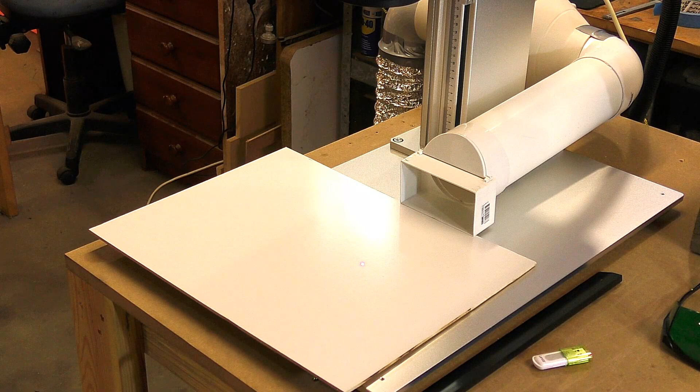Okay, you can see the smoke rising a bit there, I think. So I've got a mark there now. Hopefully you're picking that up. So now we can accurately measure that, if I can. So we have 237 and 256. I'm going to show you what to do about that.

So we come down, tick continuous off, open this dialog box up again. So scale. We'll do Galvo 1 first. Now I think this is X. Galvo 2, sorry, is X. So you go in here, it's very similar to Mach3, and you say, okay, we wanted it to do 200 millimeters. Alright, 200, and the actual measurement,

237. So we go in here and say 237, press OK, and it will alter the setting. Okay, think of this as the steps per mm in Mach3. So that's what it has determined it should be.

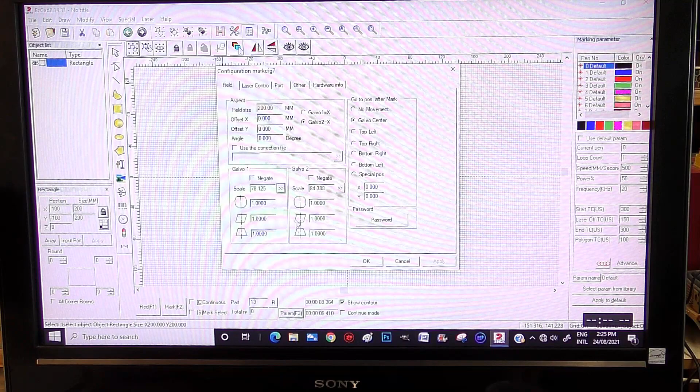So we go here, 200, so it's 256, and it has altered it to that number. So we're not going to worry about the bowing and out of square yet. Okay, so we're going to say OK, and we're going to go back to a piece of material that we're marking, and see what difference that's made.

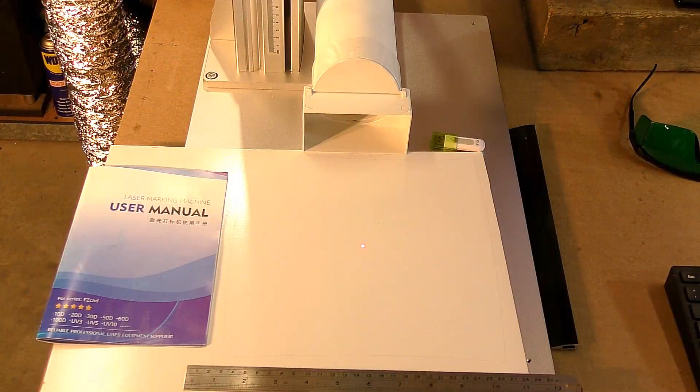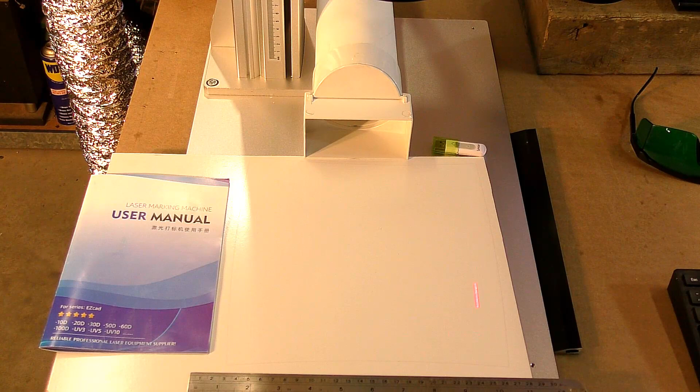Okay, I've put a couple of things on the table here just to see if I can keep the camera focused. Alright, I'm going to run the red dot again. Oh, that's a lot smaller. And I'm going to stop that and I'm going to burn it on continuous. Here we go.

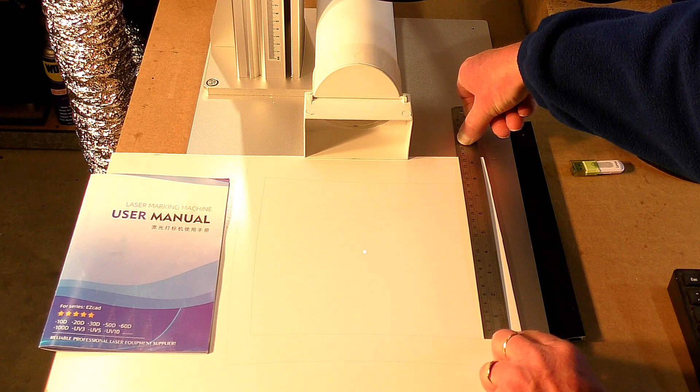Okay, that is now exactly 200 millimeters by 200 millimeters exactly, but we've still got the bowing here and in here, and I'm going to show you what to do about that.

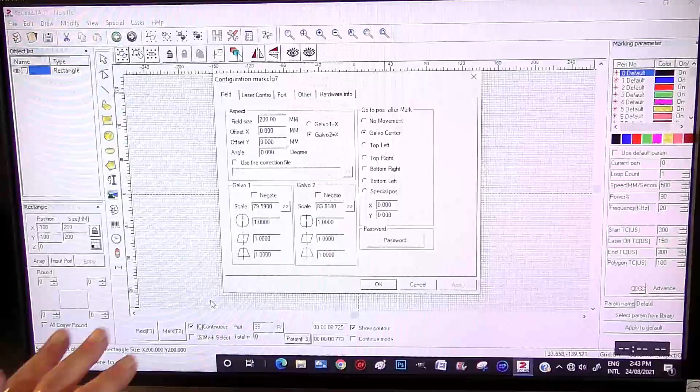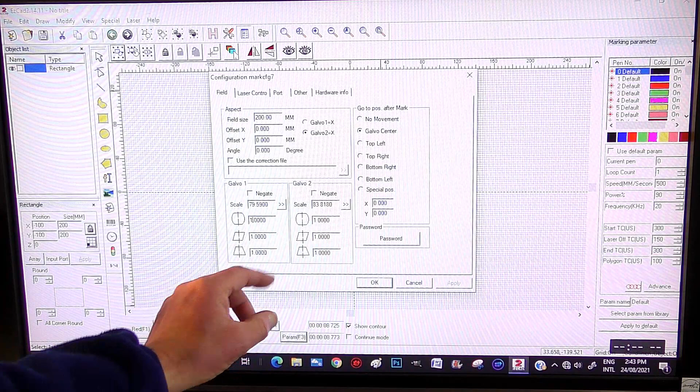Okay, so this is where it gets a little confusing, but the best way I can explain this: you see these are whole numbers, this 1, value 1. So what I can tell you is if you reduce this below 1, you're going to tend to squeeze the sides in. And if you increase this one above 1, it's going to take the top and bottom out.

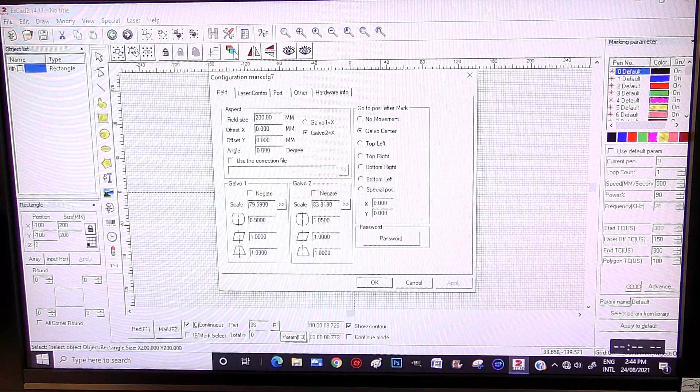So we're going to alter this now, and we're going to say 0.9. Just take it down a little bit. This one even less, I think. I'm going to put 1.05 here. And I'm going to OK that. And we'll see what difference that makes.

Okay, let's switch the red dot pointer on. A little bit of a shift there. Okay, let's turn that off. Let's mark it. Okay, stop.

Let's get my ruler. It's getting a little hard to see now. Oh, that's not far off. That's not far off at all. Actually, that's more luck than judgment. It might be very fractionally off there. You can see it's pretty straight, but it still has a very slight bow, so we're going to alter that one a little bit more. But I think we've gone over the top with this one. In other words, we've taken it the other direction. Alright, so I'm going to make a couple more alterations of figures here and see where we go.

Okay, so this should be the last mark, hopefully, because I've done this probably about 20 times. Okay, and mark. That's exactly right. And that's exactly right. And it's absolutely square. Absolutely square. Finally.

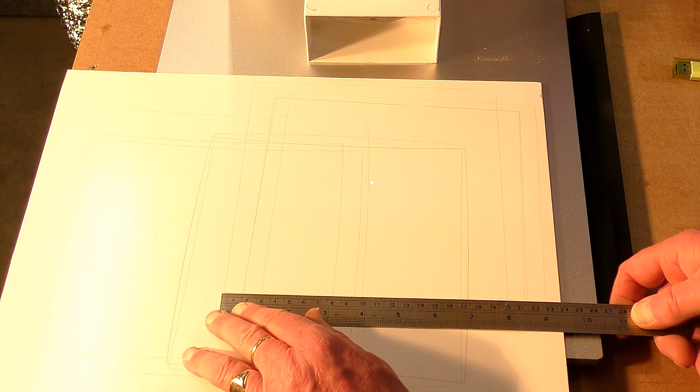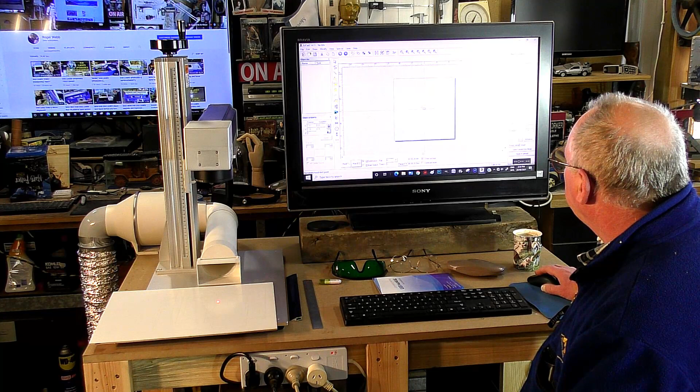Okay, so that is how to set the parameters up for a particular lens and a particular fibre laser in EzCad 2. There is, however, one more parameter to check and determine, and that is the focal distance now of this lens, which is a very easy process to do. So I'm going to delete this square, and I'm going to make another little square right in the middle here, right there like that.

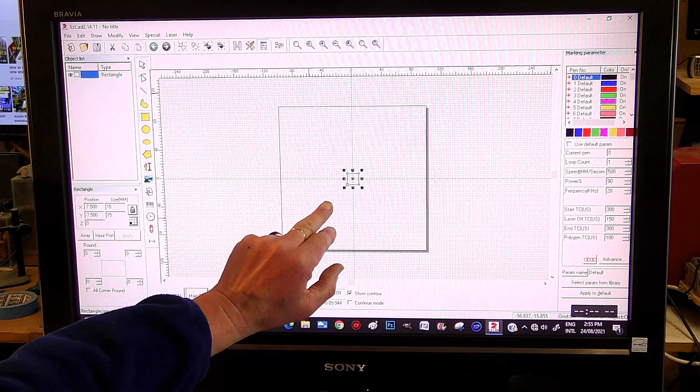Oh, look at that, 15mm. It's snapped to what I really want. And I'm going to do a process now called hatching. I'll get you in a little bit closer for this. Hatching is really filling that square in with lines that the fibre laser is going to follow—in other words, colouring this in using lines for the laser.

So you've got to go up to the H, and it will do several different types of hatching. It'll go from one side to the other, move across, and only fire in the blue—the red mark is moving from one position to another and not firing. Or if you press that, I think this is what they call bidirectional, so it'll fire in both directions. Or it'll do a swirly squarey thing.

Let me see, dotty—oh, we're back to that. So I think this bidirectional affair will... let me see, I like this one actually. I think it'll fire, not only keep on firing continuously, but go back and forth.

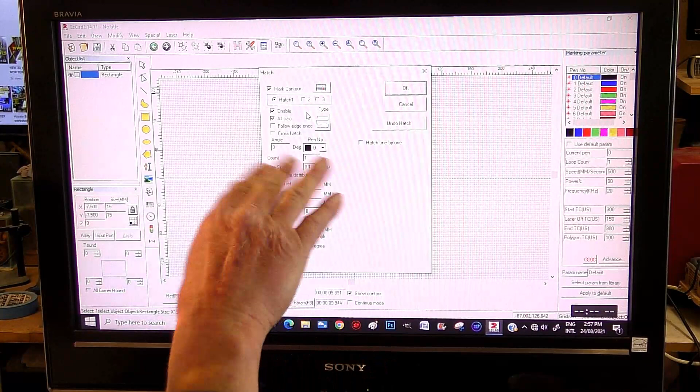Hatch 1, 2 or 3. So if you notice, hatch 1 is enabled—in other words, it's going to carry it out. Hatch 2 is not enabled, so it won't do 2 hatches. In actual fact, we only want 1, because this is just making the laser do a firing process on a piece of aluminium, just so we can raise the lens up and down and find the focus.

Or the focal point. Line spaces now, 0.1—yeah, that's fairly coarse. It's okay, we're only trying to find the focus.

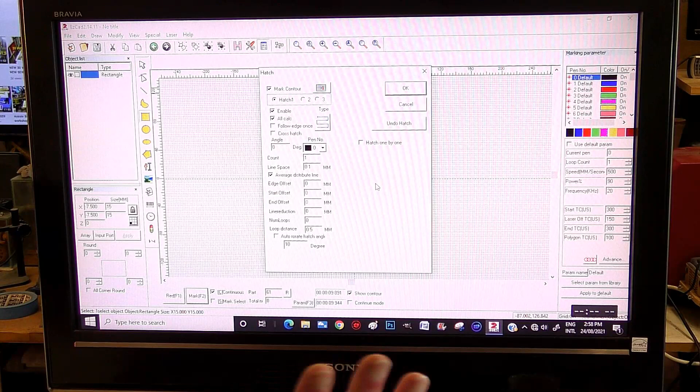We don't need to worry about any of this. We don't need to worry about a second path 45 degrees out. We don't have to worry about anything like that at all. We're just going to do a continuous. I'm going to hit continuous down here—it already is actually, but I'm going to hit continuous and it's going to keep on doing this all the time until I tell it to stop.

So we've set now a very simple hatch. We're going to say OK, and now it's coloured that in. Pen 0—this is the actual hatch we just did. That's it, so it's pen 0 when it's on, and it's highlighted blue.

Speed 500—yeah, that's okay. 90%. Yeah, okay, we're going to run with 90%. And frequency—now frequency, a very quick explanation on frequency.

All right, now frequency is actually graphically shown here as the beam hitting the material as a circle. It is a round beam. So at 20 kilohertz, you're going to have a bit of space in between—if you take the peak of this one to the peak of this one to the peak of this one, it's going to fire there and move, fire there and move, fire there.

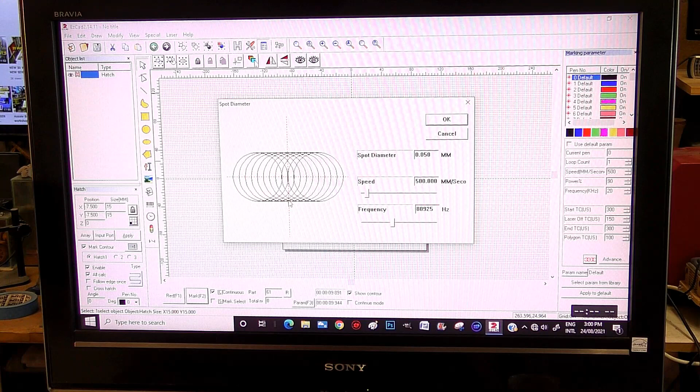So if you raise the frequency up like this, if I go up to 80—there we go, there's 80 thereabouts—you'll see that it fires very, very close together. Now you can imagine that, say, 90% energy is going to be dispersed over all these different firings, so it's going to be fairly weak. Okay, but it's going to happen really fast.

So if you bring it back down to 20, if I can make it 20—there you go, there's 20, just over 20. You can see that you're going to get full power for there, there, there. So you're going to be able to remove material. So the lower the frequency and the higher the power, the more material and the deeper you're going to go.

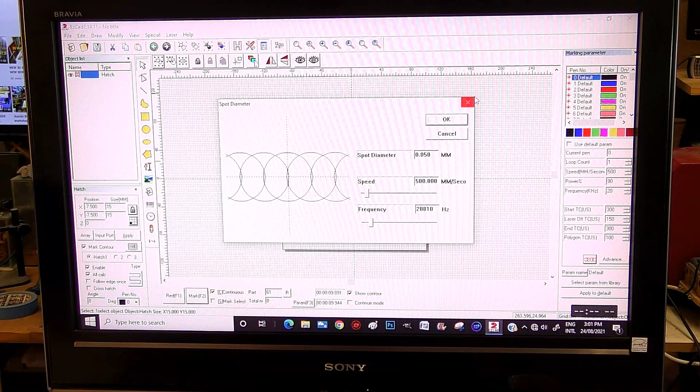You're going to remove more material because per firing, the energy of the laser is much, much greater. We'll go more into this as we progress with demonstrations and videos. So we'll come out of that. We'll run with this at the moment because, like I say, we are only going to run this—okay, we're set there for continuous as well. We're only going to run this to enable us to focus the lens. So that is the next job.

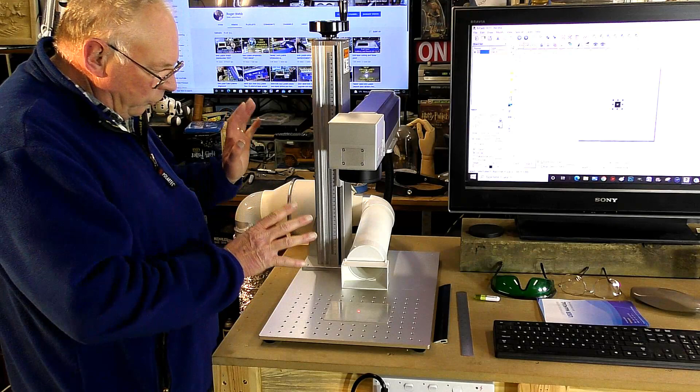Okay, so as the laser is running, when I fire it onto this piece of aluminium, I'll have it continuously running. What I'll be doing is winding this up or down, and what I'm looking for is the strongest reaction on this piece of aluminium. I'll focus in on this plate on the widest field of view for you to see, but that's all I'm doing, winding this handle and taking the head up or down. The focal distance of this is about 3 millimeters or less, maybe only 1.5 millimeters.

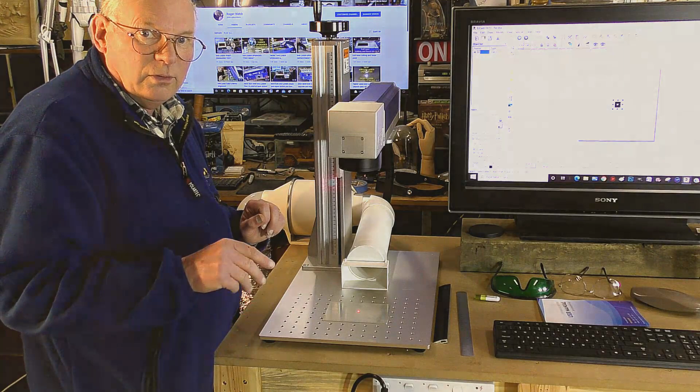Okay, I just made a few setting alterations. So that's down, coming up. You see this is about as bright as there. Okay, I'm going to say that's good.

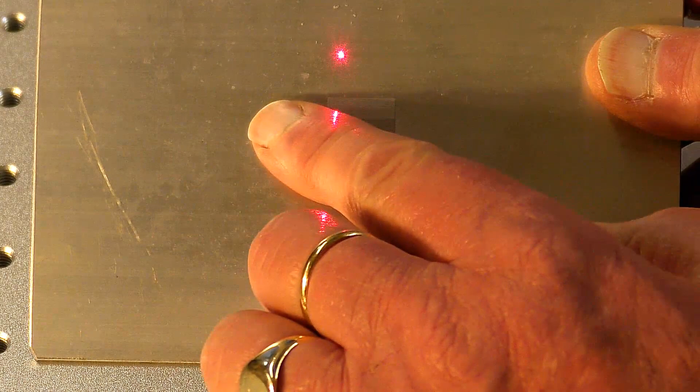I'm wondering whether that's warm, actually. That's okay, dissipated. You can already feel that it's actually dug some of that out. Probably 2 or 3 thousandths of an inch, something like that, but you can definitely feel it, definitely feel the ridge.

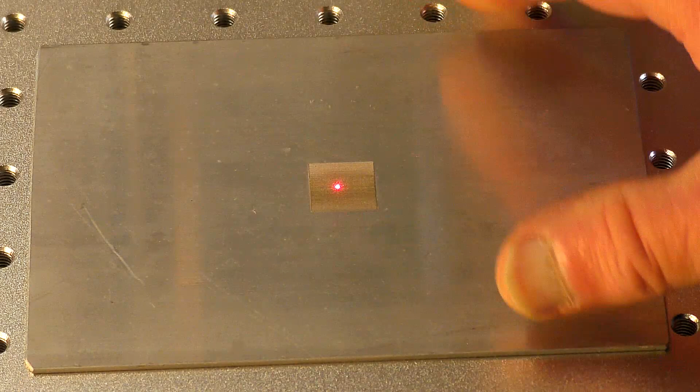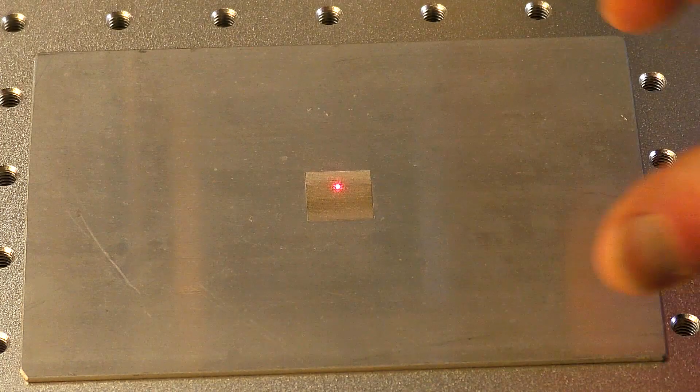This isn't a particular setting, just a setting of power and speed that I chose to give a visual of the focus. So now that's focused right, and this is 1.5 millimeters. So why I put that mark on that graduation scale is so I know that with this lens it is now focused to the bed. So if I put something on that bed that is 3 millimeters or 10 millimeters in thickness, all I have to do is from that mark measure 10 millimeters or 3 millimeters, whatever the thickness of the material is, up. Take this up to that mark, and I know it is perfectly focused to the top of the piece of material on there.

So we've done a lot today, and that is how to set up EzCad2 or EzCad3, for that matter, to a fibre laser.

In this case it's a 30-watt Raycus laser, which is the best in the business. If you're looking for a laser, get a 30-watt. A 20-watt is okay for hobbyists, it really is just a hobby machine. It's not until you get up to the 30-watt level that it becomes a professional machine. Really the ultimate is 50 watt, but for what I do and all the work I'm going to give this, 30 watt is absolutely as powerful as I would want to go.